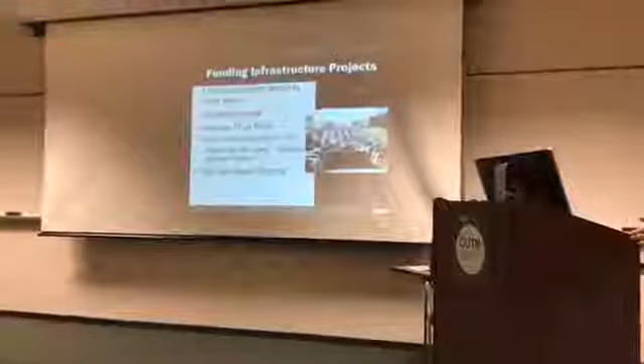As you can imagine, the cost of everything has gone up, construction has gone up, and there was no funding to do it because nobody wants to take the initiative to add more taxes, right? You know how politics works, no more taxes.

In addition to that, the efficiencies from the cars, all the Priuses of the world, have really reduced the amount of gas that you purchase. So there you go, you again have a reduction in the Highway Trust Fund.

So when you look at entities like the state and local governments trying to build something, they had to look for alternative ways to fund projects so that they can build it. So what I want to do is go through the normal contract types and then talk through alternative funding, so you have an understanding of all the different facets of funding that we go through in the transportation industry. My team predominantly does infrastructure projects, roads, bridges, toll roads, all of that.

So the standard state, federal, and local funding is usually used to do what we call a design-bid-build job, the standard process. You have a set of plans, you let it out to bid, and a contractor bids and constructs it. I'll go through the details of that.

A design-build is where the contractor and the designer are on one team and bidding on a job together. Then you have the alternative funding, which is a design-build-finance, basically design-build but with a financing aspect to it. And then you have design-build-finance-operate-maintain, which we always refer to as the P3, the public-private partnership. So when we go through that, you'll understand the distinct difference between a design-build-finance and a P3.

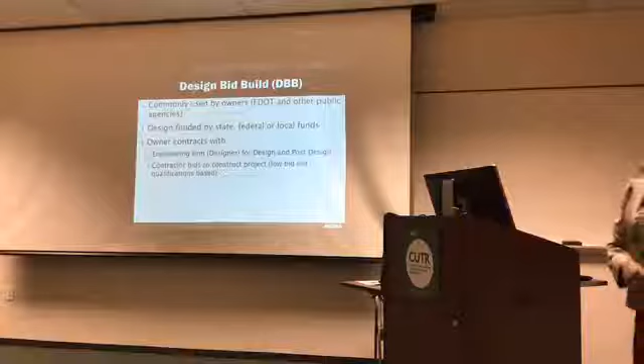So let's talk about design-bid-build. Like I said, it's commonly used by DOT and all the other public agencies. Design is always funded from federal funds, state funds, any local funds. Sometimes there are counties who want to put in some money to build their system, so there's local funds coming in addition to the state funds.

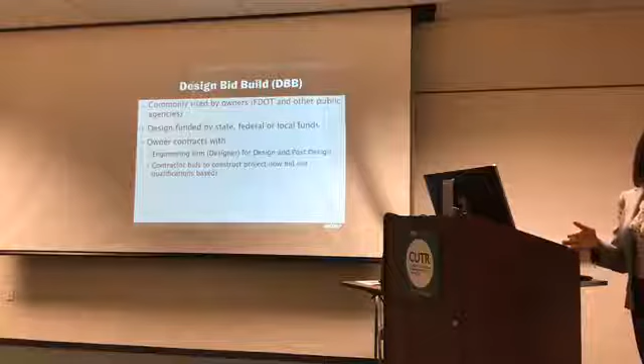And the owner, in this case let's talk through FDOT because that's my realm of work, so the owner is FDOT. FDOT will contract with the design firm. The design firm is selected based on, Florida requires it to be a qualitative selection, not a price-based selection for design.

So we comply with what's called the CCNA Act, a legislative act, the Consultant Competitive Negotiations Act. The selection for a designer is purely based on you presenting on the project and showing your expertise and qualifications. You get shortlisted, you've got to go present to the owner, and you win the job.

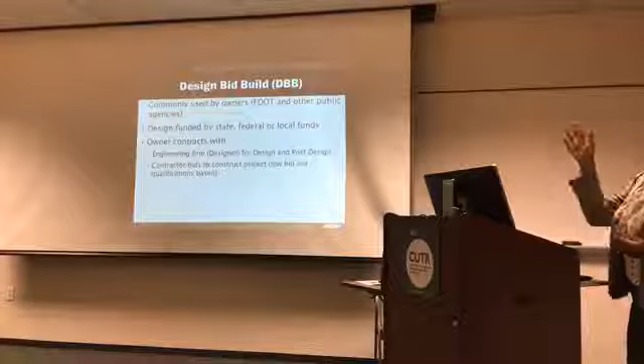So when you win the job, you are the designer for that project. You go through the process of identifying additional right-of-way, utility conflicts, doing all that, which takes about 2 to 2.5 years if it's a substantial widening job. And sometimes right-of-way takes a little longer.

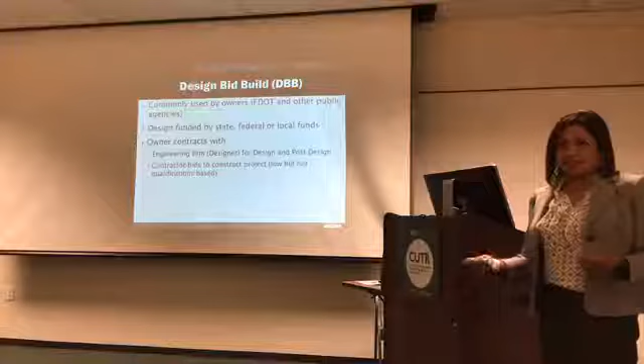So you're going through all this process to make sure everything is in compliance with the scope and in pretty good shape, because the contractor is going to come bid on it. You don't want any errors in it, because errors basically come back to the designer. So the designer ends up designing it, signing and sealing it, and then it goes out for advertisement for a contractor to bid on.

Well, the contractor's bid is purely based on low bid. No qualifications come into the picture. So the owner doesn't get the benefit of knowing if a contractor is really good at this type of project, because we have seen situations where a new contractor is trying to come into the state to do work and they really don't know the nuances of FDOT's work, and they end up low bidding it just to win the job.

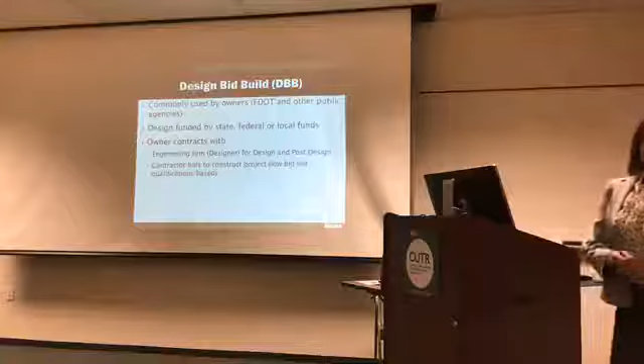We call it buying a job. When you see a job that's way low bid, all the engineers panic, I'll be honest with you, because they're looking for errors and omissions to try to recover their cost. So that's kind of a common theme.

If you see a new contractor win a job, you're all fingers crossed. So the contractor bids on it, and they have a duration they're required to meet, the scheduled duration, and they build the job. So like I said, the owner has two separate contracts, one with the designer and one with the contractor.

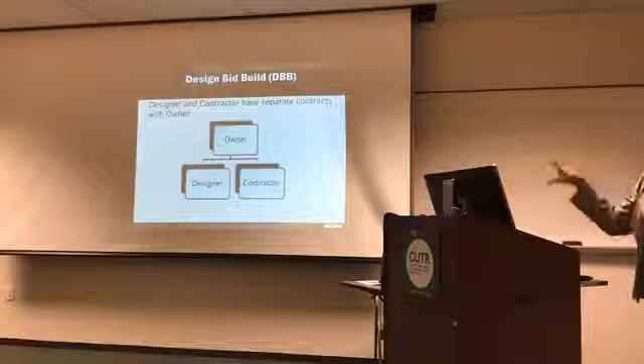While the construction is going on, the designer actually goes through and does what we call post-design services, which is basically supporting the contractor. You have requests for information, RFIs, you have shop drawings, all of that come to the original engineer of record, and we go through and support the contractor to make sure it's built per our plans and built for the scope that the owner was expecting.

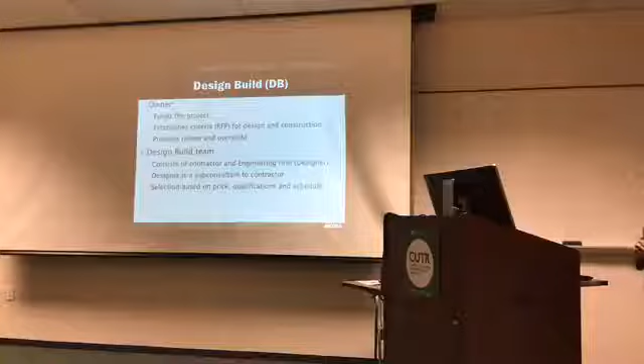So let's go into a design build job. This became quite popular in Florida in the early 90s. The main incentive to do a design build is how it can accelerate a job. That's the main reason it all started getting very popular. And then it got really popular for a while and then backed off because it had its own issues.

So the way a design build works is funding again comes from the owner. The owner brings in federal, state, or local funding, funds the job. The owner establishes an RFP, a request for proposal. So the request for proposal includes the scope of the project, the specifics of the project that the owner wants.

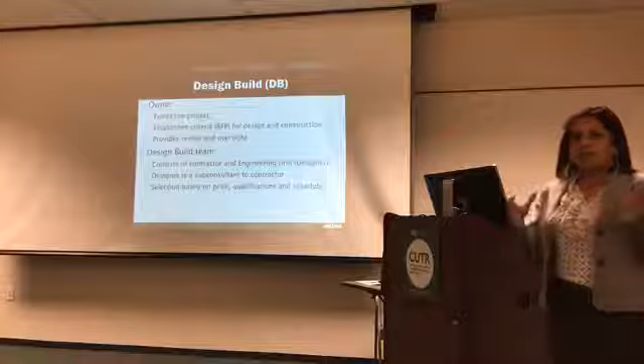The level of detail the owner wants, in terms of where the accesses are at the ramps for the interchanges, all of that is very defined so a contractor just can't come build whatever they want. It needs to be what the owner's final outcome is. So the owner's responsibility is to do the RFP. Once the RFP is advertised, then you go through the process of how the selection happens.

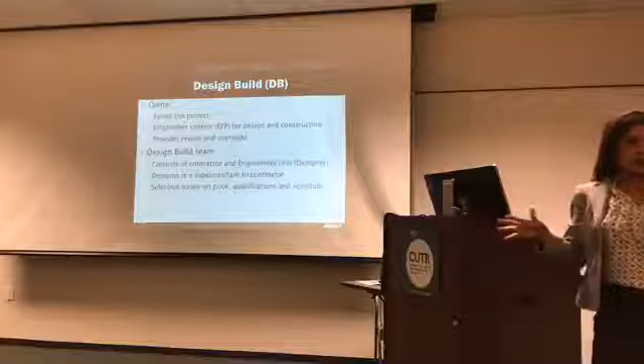The future responsibility of the owner after that is purely review and oversight. So you'll have reviews of the design plans, to make sure the designer is providing plans per the scope in the RFP. And they do construction oversight, so there'll be somebody in the field called the Construction Engineering and Inspection, CEI. Lots of abbreviations here. The CEI oversees the construction, for design bid build too.

So the design build team, this is the difference. Remember how I said the owner has a contract with the contractor and the designer separately? In this case, the owner has only one contract. It goes to the contractor. The contractor has sub-agreements with the designer as well as all the subcontractors he or she has to use.

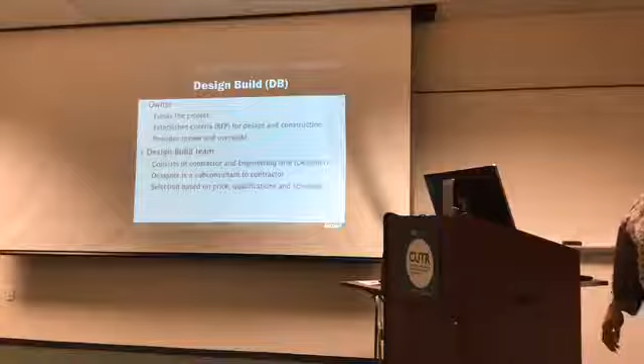For say bridges or utility relocation or whatever it is. So the owner is really only directly in communication with one person, in terms of the contract terms, which makes it easier for them. Of course, they're communicating quite a bit with the designer because the designer's criteria needs to be what they're looking for. So the designer is a sub-consultant to the contractor.

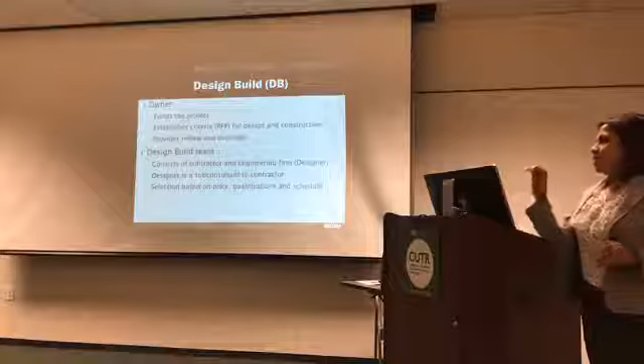And the big difference you see is the last bullet: the bid is actually the overall proposal, and the bid is based on qualifications, price, and schedule. Remember in design bid build, they have no hook for the contractor to see if the contractor can do good work. In design build there is, in the phases as they go through to select, they do give a grade for the contractor, so they have mechanisms to kind of put somebody out if they don't want them in the overall picture.

Can construction start before the design is at 100%? Yeah, I was gonna go through that. That's the other big advantage, the schedule advantage they're gonna get.

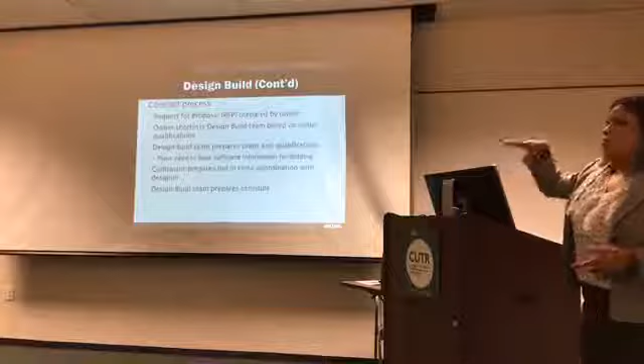So the contract process: you'll have the RFP the owner puts out, it comes out as an advertisement. So us, like we do quite a bit of design build, we team up with the contractor, come to our terms and conditions agreement and what our role is, what their role is, and who are the sub-consultants that we have who are gonna support us.

And we put that team together and go forward to respond to the RFP. The owner takes that response and shortlists and grades it. So there's a phase 1 and a phase 2.

Phase 1 is that first stage, what we call the expanded letter of interest. They have specific criteria they want you to show to see if you're qualified to do the job, which includes grades for the contractor, fatalities they've had, things like that. So it's not just the designer's qualifications, they're looking at the contractor's qualifications too. There's a point system broken into 5 major criteria, 20 points total, and that's what the ranking is based on.

When the owner releases that point system, for a design build job a lot of times they don't shortlist per se, they'll do the ranking. Based on the ranking, the contractor team decides if they want to go to phase 2, because each point is an adjusted score tied to the price. So if you're off from the first ranked person by 3 points, and the project's worth 100 million, that's a lot of points and a lot of money you're leaving on the table. It's hard to overcome that in a bid, so a lot of times they walk away from it.

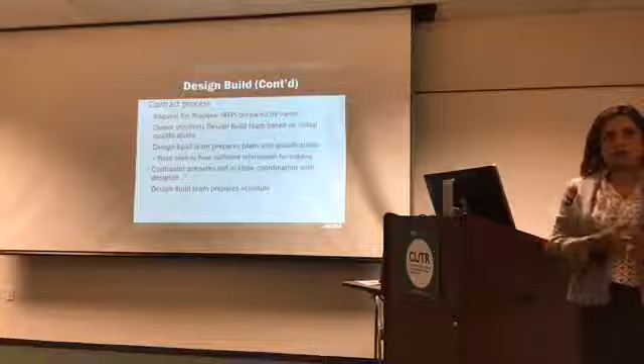So the design build team that decides to go forward to phase 2 will prepare the plans, and it's a very collaborative effort. When I first started doing design builds, I'm gonna date myself, it was in '97. It was fun for me because I always did design in an office, and once in a while I got an opportunity to go out in the field if I had questions.

My background was bridge design, and I really wanted to see how things were built. With design build, you already build that relationship with your partner, the contractor, so you talk through, hey, we want to build this way, do you have any other tricks to get it done faster? You really collaborate with the contractor to find the best way to design things, because in transportation you have to phase the construction, and there's a lot of nuances with that. It's a great opportunity to learn a lot through the plans preparation and bid process.

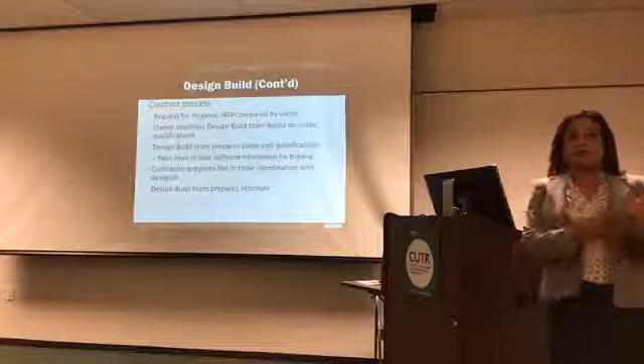So we end up having to do plans which are not 100% signed and sealed, they're plans ready for a contractor to bid on. The RFP will say we need X, Y, and Z plans confirmed, because that becomes their contract document saying you've agreed to do all these things. But in addition, we have to do more details for the contractor, because he needs that to bid it, since what he puts in as a price is final. The owner signs off on that agreement and he's not going to change it.

So even during the bidding process, there's a lot of coordination going on between the contractor, the designers, and all the sub-consultants like geotech. The design build firm also prepares the schedule, because the owner has a limit on it. A lot of times they say this is your max - if you can't meet the max you have to put your schedule duration, and if you can't meet the max at all, you get thrown out and automatically disqualified.

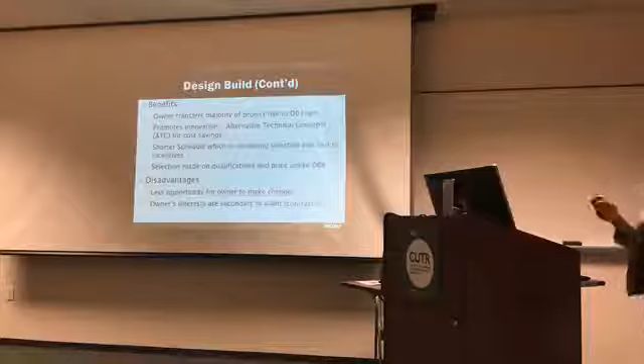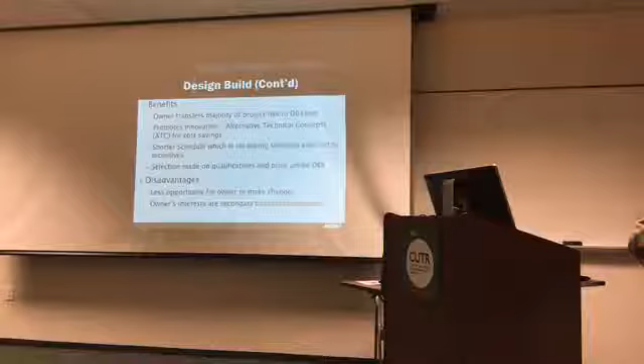So the benefits to the owner on a design build - like I said, when they set up an RFP, over the years FDOT has learned they had to really tighten the screws on their RFP. There'd be little things where somebody would figure out the language isn't a 'shall', which is confirmed language, or if you say 'you will do this,' the argument came back that you didn't say 'shall,' so we changed it, now you can't tell me I can't build it that way. So a lot of the RFP language got very tweaked because they didn't want contractors figuring out ways to get around it. Once the owner does a good RFP, they've basically transferred all the risk to the contractor team.

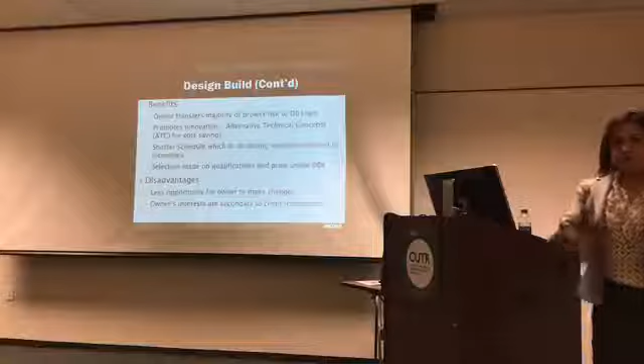Because the owner only provides as part of the RFP what they call informational documents, the plans are more conceptual. If they give you any geotech, because they did some, it's informational—take it at your own risk. If you want to know more about what's going on in the ground, you better go do your own geotech before you put that bid in. So all that risk gets transferred to the design build team, which is great for the owner, because there's a lot of things you discover as you go through final design. That's why owners like the fact that the risk gets transferred.

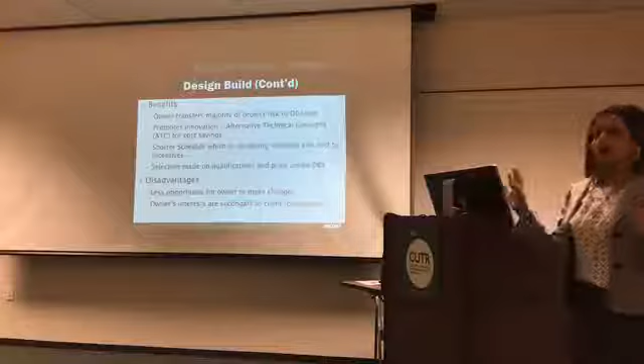But the other big thing that made this very popular is what we call alternative technical concepts. During a bid phase—it depends on the project size, so when we talk about I-4, the I-4 Ultimate project was a $2.3 billion job. I think it took around 11 months from when we decided to move forward to when we actually got everything submitted, because the effort is substantial. So during that phase, you do these things called alternative technical concepts.

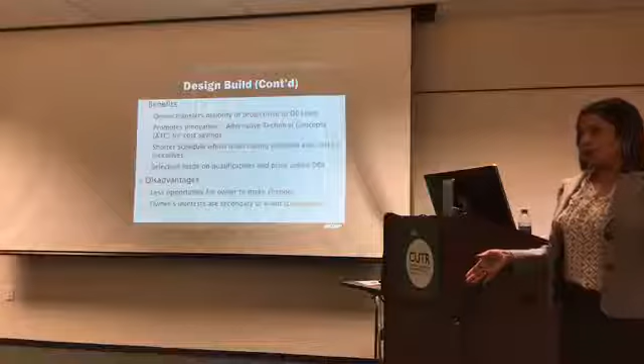For example, you can take an interchange where the owner has a concept for a certain type of bridge or span configuration. If you have something innovative, you present it to the owner and say, here's what I want to do instead of your concept, and here's the benefit. A lot of times the contractor's benefit is on the cost side, the price. As long as you can justify it to the owner that there's a good benefit, and you haven't drastically changed the scope of that interchange, that idea is yours.

Nobody else on the other teams gets to hear about it. Unless there's a true scope change, the owner does not have to re-release the RFP, which is great. We threw out like 60-something ATCs on I-4. Not everything stuck—you sometimes throw things out just to test the waters on the scope, to see if they'll bite. That's a great way for them to save money too, because now you're getting new creative ideas from the team.

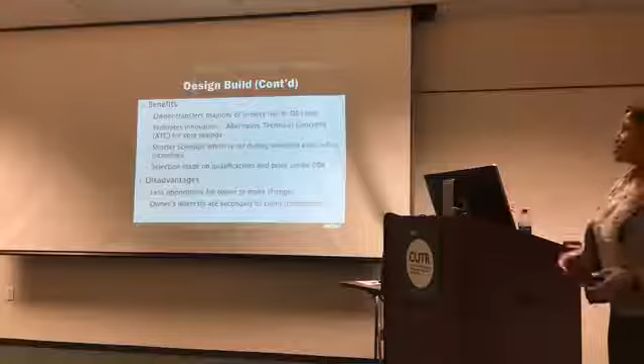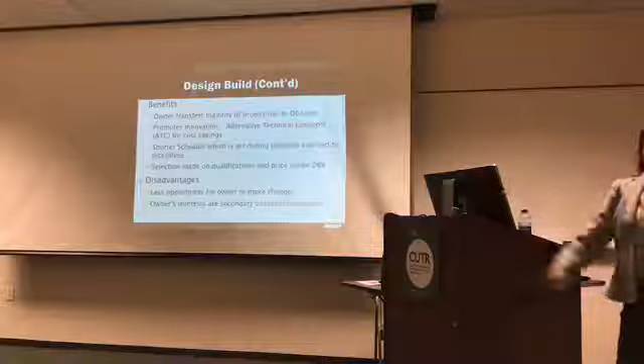And the shorter schedule—to go back to your question, that's the big difference. Remember, in design bid build, the designer designs, goes through 2.5 years, signs and seals, then the contractor starts constructing. In this case, once you win the job, you start breaking it out into packages. The initial package would be clearing and grubbing, clearing out for the contractor to come through and do a temporary pavement or whatever it is. So you're not trying to design the entire 100% set of plans for the whole job.

If it's a 3-mile job, you basically base it on each of your MOT phases. You look at it and say, okay, my first phase includes this—give me a set of plans for that. The owner reviews it and releases it for construction. It's called RFC plans, released for construction.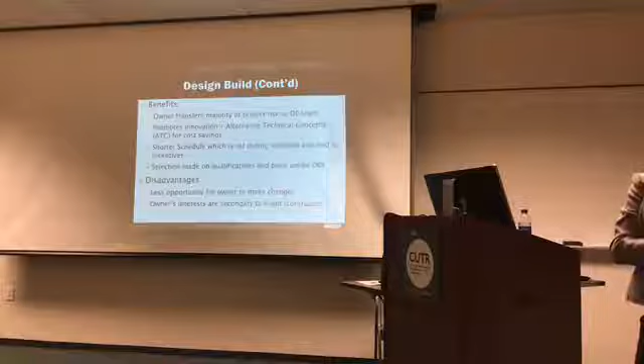Normally on a design build job, because contractors are so hungry to get their job done, paid, and out, you don't really get the duration you'd normally get on a bid build job, even with all the packages. Say it's a 2 to 4 lane widening job—normally it takes about 2.5 years for a designer to do it. They'll give us 6 to 7 months to do it. That's how fast-paced these projects are, so there's a lot of burnout happening on the design side.

But the benefit is, construction starts right away and you're working with them, and they may see things in the field while you're doing the next package, and they say, hey, fix this—we saw this in the field. So it's a nice way to do design because you're working with them side by side, looking at different options, and the schedule is completely shortened. The design schedule is hardly any design schedule at all. When you go to I-4, you'll be floored how quickly we delivered that project.

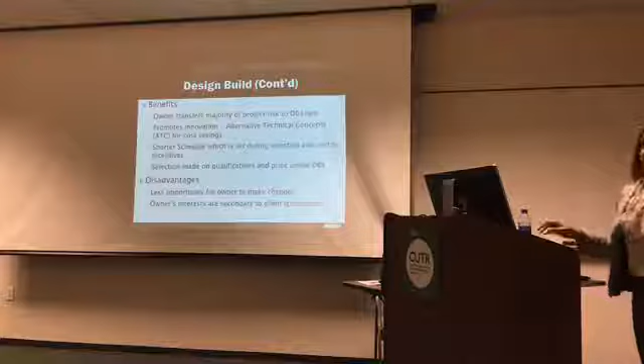The selection is based on quals and price, which is a good benefit for the owner. The disadvantage is once that contract's locked in with the RFP, if the owner wants to make a change, contractors usually don't have a big appetite for it, because they know it'll throw a kink into their schedule and what they've already planned. A lot of times that's where a contractor tries to get more schedule time and more money.

When they're trying to low bid it, the minute the owner asks for a change, every average price shoots up with the contractor because they're thinking, you really need this change, so I'm going to make money off of this.

So a lot of times owners get stuck and can't make major changes, having to hold back. Another thing owners complain about, though I don't think it's truly factual, is they feel like they don't have as much leverage with the designer. They say, we know you know the criteria, but the contractor is always trying to finagle something, and since you're getting paid by the contractor and your agreement is with the contractor, there's less opportunity for us to dictate.

The problem with dictating from the owner's standpoint is, if the owner says 'I want you to change this to this,' but what was presented was per criteria, per RFP, that's called a required change by the owner, so they have to pay the contractor for it.

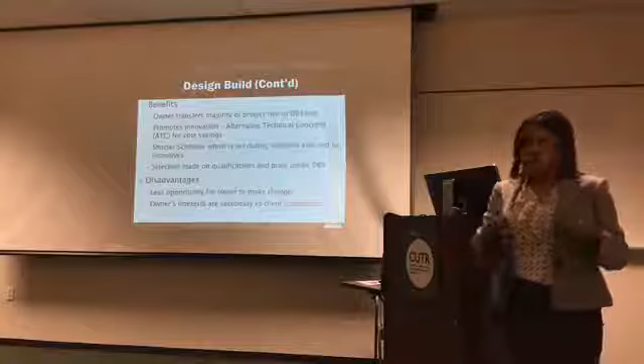So reviewers had to get trained, saying you cannot go ask for a want just because you want it that way, just because that's what you're used to doing, if something is already working and fine. You can't do that, because they will ask for additional money and schedule.

So to give you an example about design build, you all know about the Howard Frankland Bridge. It's going through procurement right now. Phase 1 has happened, but the people involved haven't moved to phase 2 yet. This is basically what I was talking about.

If you look at it, the phase 1 scores are over a score of 20. You see all the additional contractors at the bottom — they just decided not to go to phase 2 because their scores were substantially lower than phase 1, 16.8 versus 13.8. That's 3 points on a $30 million job.

People back off at that point. So for the number 3 and 4 ranked, and the number 2 that's sitting in there — they had a score of 14, off by 2.8 points, but in the final ranking they came in second because they really lowballed the bid. To be honest, Pepper Contracting has only done very small jobs.

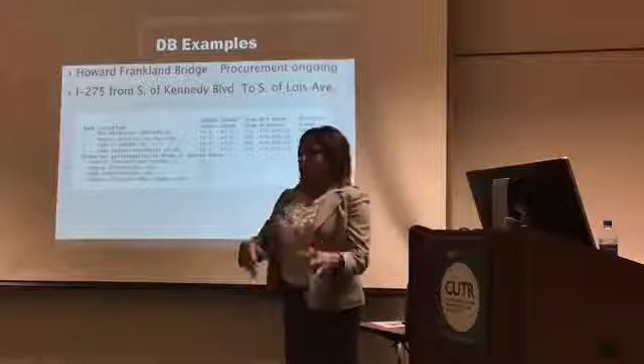So that's one who was trying to buy the job, basically. The phase 2 score is over 80 points, so the total is always 100. Phase 2 is where, after phase 1, you're doing your plans and preparing your proposal, and that's the score you see in the second column.

If you look at the proposed time, everything says 520 days except for Pepper, who's at 490, mainly because the contractor says, I kind of need 520, I'm not going to lowball it because of the schedule. And yes, it's working calendar days — contracting is always calendar days.

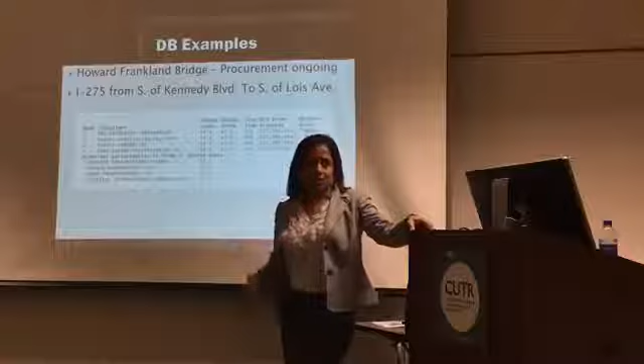So the contractor sometimes has a formula that includes schedule, which tightens things up, but this one did not include a schedule formula — it was pure price plus the phase scores. So if there's no schedule tied to winning that final number, they usually just take the schedule the department gives them rather than trying to squeeze it down.

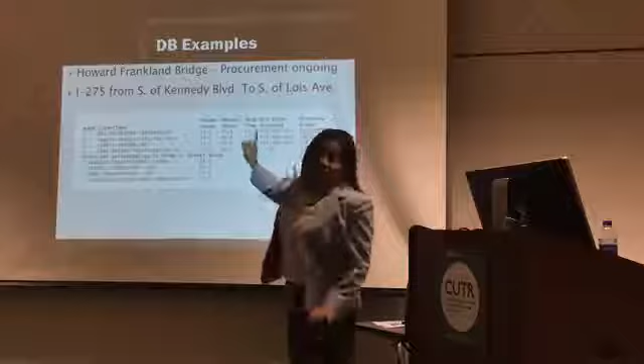Another reason people tend to do things like this is phase 2 is scored all at the same time, so they get to see that schedule when they're scoring. They think, maybe I can get them to swing a few points my way because I gave a shorter schedule. So the final outcome is the adjusted score, which is basically the price divided by that plus that.

Whoever gets the lowest adjusted score will end up winning the job. So in this case, it was Middlesex, and we work quite a bit with Middlesex, very good contractor to work with. And you know where this is, right?

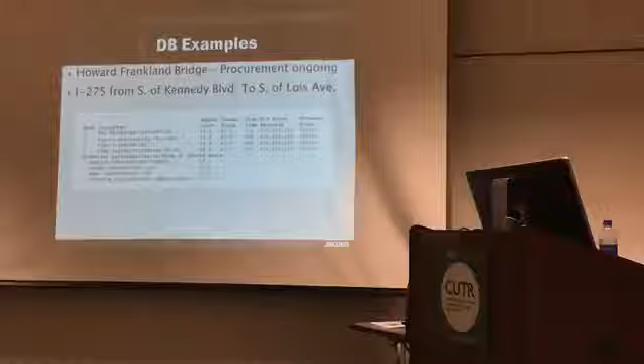The totally messed up loop ramp when you come off of 60 Veterans to come onto 275, that loop where you just sit in traffic - that's what that is. They're actually modifying that to improve it.

So let's go to design, build, finance. And all that's public, all those numbers. Everything's public, and after the selection, the proposals are public. So if there's something that looks funky in the scores, somebody can protest it and say, I want to see all your scores and your proposals because I think you swayed your score for somebody, because the score details it.

The people who are scoring, there's usually at least 3 people in the technical review committee, so they get to see those scores, what added up to that 80 points, and if somebody looked like they swung it, they'll protest it. They'll say, I think you were trying to get this contractor to win the job, so we're gonna protest it.

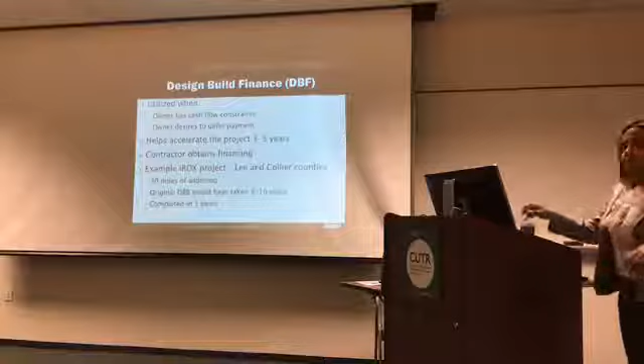So design build finance, again, is basically the same concept as design build, but I-75 is the best example for it. It was a 30-mile widening from 4 lanes to 6 lanes. The stretch through Lee and Collier County was a disaster through the 90s. You just could not get through there during peak time.

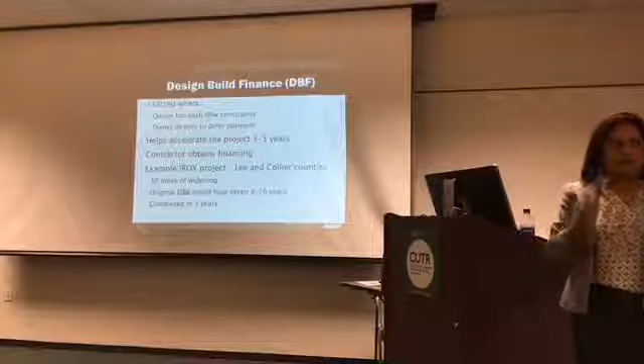FDOT's funding was sitting over like a 6-year program. They could not get it, because it was all broken into multiple projects, and they could not get the funding pulled in because that's the amount of money they had. So when they have a cash flow constraint, by legislation they can defer it to a certain period within the work program.

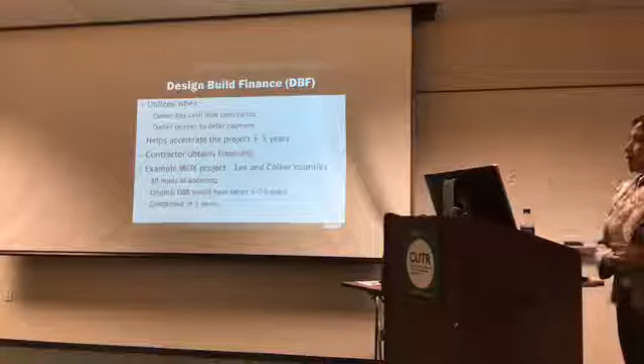When they can do that, FDOT tends to want to go to the finance option if they want to build it faster, because they don't want to wait till the overall funding comes 6 years from now and then do a design build. So in I-75's case, if you look at it, 30-mile widening, the original design bid build would have taken 8 to 10 years.

So the contractor came in, did everything similar to the design build - the scores and all of that - but they have a financing arm to show FDOT how they're going to build this with the financing they're going to pay for, and FDOT just repays them. It's like a loan. The contractor gets a loan, FDOT pays back the loan.

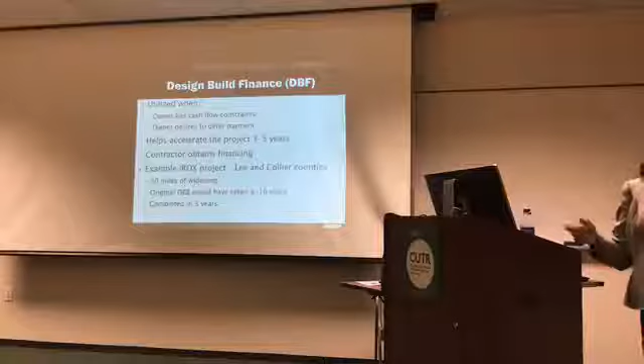So they were able to do the entire job in 3 years. And FDOT got their job much faster, and they programmed their money and just paid them back. I think they paid them back in 6 years, and they were done. They were out of the picture.

So DBFs are usually done only when they're in that sticky situation. You don't see that very commonly. I-75 was actually the first one that they did in Florida. Then we had a job that we did on I-95 on the East Coast in Volusia County. But they don't tend to go to that very often.

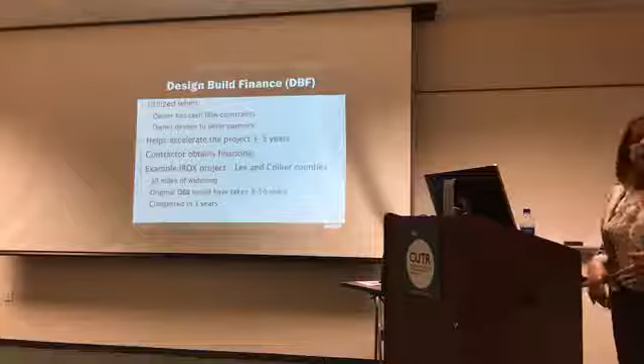And this didn't involve tolling at all? No tolling at all. Because the way the toll projects work is that the agency is Florida Turnpike Enterprise. They're an arm of FDOT. They're one of the districts of FDOT. FDOT has 7 districts plus the Turnpike.

Each district covers certain regions. So this area is covered by District 7, and Orlando is District 5. So the tolling money stays as part of that district. They can't take it and use it in District 5 or District 7, because their responsibility is to take that entire money, because the Turnpike goes across the state. So they make improvements across the state with what they collect, and do maintenance improvements based on what they collect.

So let's go to the fun one - public-private partnership, P3s. Legislation allowed the state to do up to a certain amount. You can't take everything and convert it into a public-private partnership, only because legislation is concerned. One of the things you'll see is it's a concession agreement, a lot of times 35 years or 40 years, and concessionaires have defaulted, and the state ends up holding the bag on a bad project. So Florida legislation stipulates what can go into a P3 project.

When I go through the discussion, I'm going to talk about the I-4 Ultimate project, but I-4 Ultimate was set up as a 40-year concession. The funding combination for P3s generally, the state still puts in certain money, and then the private entity comes and finances the rest. But in this structure, they're financing more than just the construction. They're going to finance, maintain, and operate it for 40 years, so the amount they have to finance is substantially more than just the construction cost. So when I say $2.3 billion, that's just the construction cost. It doesn't include the maintenance or any of the additional effects out of doing that.

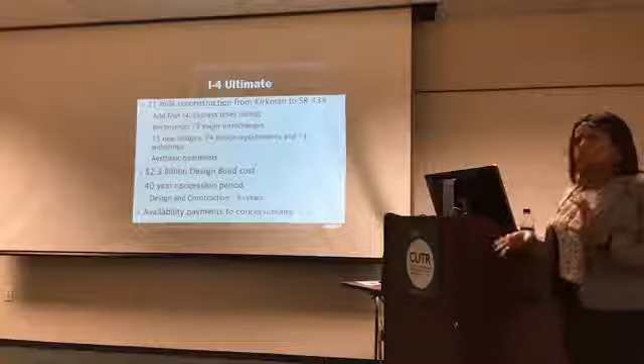There were a couple set up as they were building through, they knew they wanted to come and do something in the future, so they set it up to get that space. But pretty much all of downtown, and the downtown area had 55-year-old bridges through the viaduct and stuff, so they wanted to blow all that out. So then the price went up, right? When you have to blow all that out, the cost went up.

So what they ended up doing is saying, okay, let's make this a P3 job and put it out to the industry. A lot of times with P3s, they'll come out to the industry and do an industry forum. The forum is basically to get feedback - they'll come up with a rough draft of the RFP and things they want on the project and expect out of the contract. They get feedback from the contractor because they want to make sure there are enough people bidding on it, that they're not making it so tight that nobody will bid on it.

So the industry forum was done in early 2012. If you look at it, the project had 15 major interchanges, 15 new bridges, 74 bridge replacements, and 13 widenings, and it had a substantial aesthetic concept associated with it. When we originally did it as 6 projects, nobody really envisioned it to be this beautiful, almost a parkway effect through downtown, but they decided, hey, we're getting this opportunity to do this for a 21-mile stretch, let's make it pretty. So the aesthetics were very integrated into the bridges and the walls and stuff, which threw a whole new kink into our design side of it.

So the project got bid, and there were 4 people who moved forward. This was actually shortlisted because, I forgot to mention, on a design-build or any of these projects, FDOT gives you a stipend for the losing teams.

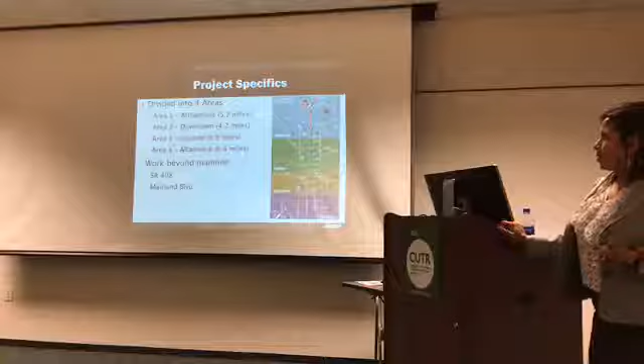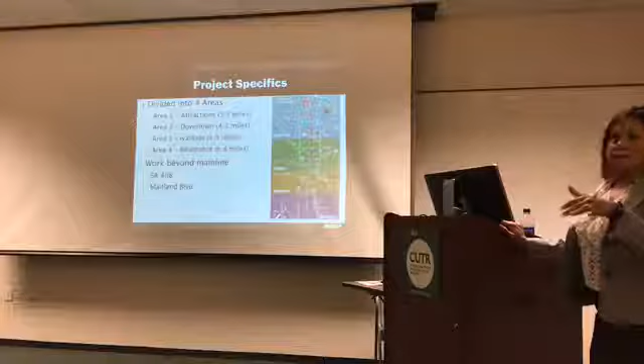So the project itself was divided into 4 areas across the 21 miles. We had to give it fancy names, because you've got to make your proposal pretty and exciting. So we called it the attractions area because it was close to Universal. Then you had downtown, the major part of the project. Then you had the Ivanhoe, which is Lake Ivanhoe and all that area north of downtown. And Altamonte is the city north of Maitland area, basically the beginning of that section. Those were the limits of the job, the total mileage.

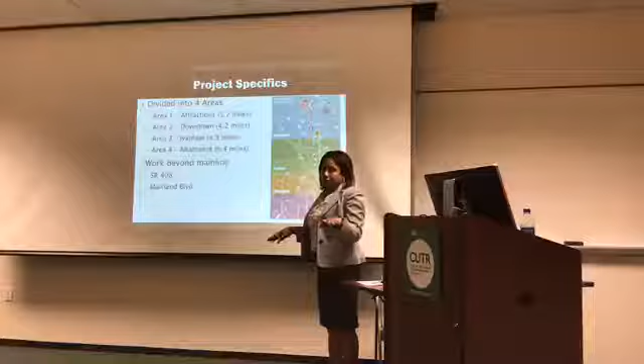But there was a lot of work beyond I-4. You can see 408 running through here - in order to reconfigure this interchange, which was a major reconfiguration, right now it's like a trumpet with all these merges going back and forth, it's going to become a 4-level interchange. So everything is direct access, eastbound, westbound, northbound, southbound on I-4. It's kind of nice when it's done. Doing that ended up impacting the west side because a lot of modifications were going towards the west, so we're going about 3.5 miles into 408 to tie down everything and reconstruct it.

And the same goes with Maitland. I can't even see Maitland. I'm getting old. Yeah, it's right up here. This is Maitland Boulevard, just south of Altamonte.

So for Maitland Boulevard, DOT already had concepts where the at-grade intersections were going to be converted to interchanges, because it's a very heavily commuter roadway, and they really wanted to get people through that system as fast as they could.

One of our ATCs was, it was kind of odd that DOT left one intersection as an intersection. That was the beginning of the bottleneck, right? We did an ATC and said, convert that to an interchange too, then you have free flow coming right through. We ended up getting that ATC, which was actually more price, right? But you got the points because you enhanced their design. So you kind of balance all that out.

When we go through these iterations of ATC sessions that we do, everybody throws out all these things saying, why do you think that's a good idea? And contractors always like, that's more money, I don't want to do that, right? That's usually what you get back, but you have to kind of justify all of that.

And project specifics, man, the biggest issue we had was the utility complex. So all these underground and overhead utilities, because you can imagine we're taking this and putting it out, so there's stuff all along the right of way on the sides.

So there were some sections of Maitland, people were asking me, there's so much construction going on, how come I don't see anything coming out of the ground? I said, it's all underground, because we had 8 months of relocation at Maitland. There was so much, we had big trunk lines from Sprint coming through the interchange that we had to move. So it was major work, and getting those utilities out of the way is key, because you don't want to go drive a pile and all of a sudden hit somebody, right? So that effort was quite substantial.

And then of course you had the stakeholders. So even though the project was set, the scope was set, there are cities, especially City of Altamonte Springs, one of the ones that we struggled with a little bit. They always wanted something else, right? We're like, no, this is set. You go talk to the owner, and then they can come tell me to change my scope, and then they can pay me to change the scope, and I'll do it. So there's a lot of coordination that happens.

In addition, you want to coordinate with the homeowners, show them where all the traffic shifts are happening, detours are happening, because that's one of the keys, that we have to do detours at night.

But the important part was the RFP was set up so that we cannot reduce the lane configuration, reduce the number of ramp lanes on the structure. So we had to maintain what was given to us as the base footprint of the roadway. We had to maintain all those lanes and all those ramp lanes through construction. So that's why you see some things getting slower, because imagine doing the maintenance of traffic while maintaining everything.

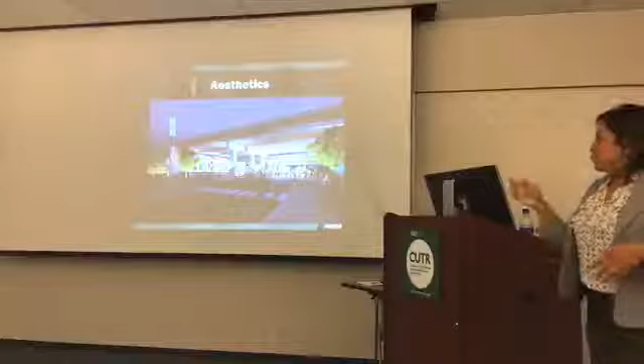So what the city is looking at doing - they have a project coming through called the Under-I. This whole stretch right west of here is where the viaduct starts. It's all elevated, all on columns. So they have all that space under the I-4 area to do what they want to do. They're trying to rejuvenate the city by making it like art festivals, things like that, right underneath it. Because there's enough parking garages around it, it's a great spot, and you don't get rained on because I-4 is right above you, so it's kind of a nice location.

So, challenges during design - change is inevitable, I already talked about it. There's lots of change that always happens. And stakeholder coordination changes, we already talked about several of those.

Keeping up with the team was the biggest challenge that I had as design manager for Jacobs, and I had a counterpart from HDR, Larry. We had to kind of keep up with the team to make sure they weren't getting burnt out because there was so much going on. People were so focused on delivering projects that we really had to take rotations to make sure people took vacations - I'm talking vacations like 3 days, a 3-day weekend.

So that we could let people go take a break with their family, do something, and come back. Because people don't realize the project is such a fast burn. When you have that level of effort, people get focused and tend to forget about personal life, and you don't want people struggling through their personal life because we made them work too much. So our job, since we were sitting at a higher level, not the day-to-day design people, that's kind of what I kept up with quite a bit with my team.

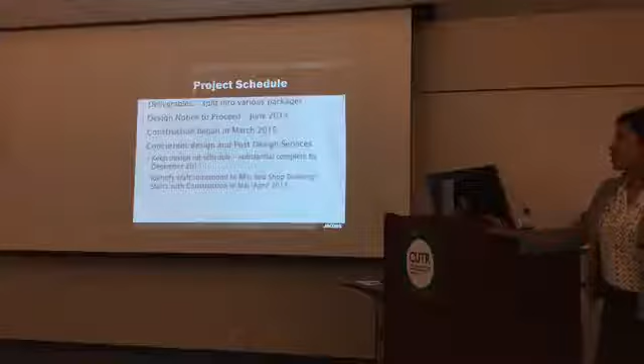As you can see, we started design in June of 2014, and construction began in March of 2015. So you see how fast that moved, and it wasn't construction of just one piece, it was across the 21 miles. Different pieces were getting cleared, utilities were getting relocated, and all of that was happening.

The other challenge we had was, since construction started in March 2015, you have to have support for the contractor asking questions from the field while we are still designing. Contractors started asking us questions in March 2015, and we weren't anywhere near done with design. So we had to identify additional people to review these RFIs when they came in, so the engineer of record could focus on designing and getting that RFC. It was a bit of a learning curve - we didn't realize how many questions were going to come our way, and there was quite a bit, so we had to identify additional people to handle that. Current status, it's 60% complete in the field.

We have a team in the project office at Maitland, which has the contractor, the concessionaire, and the owner. We have a skeletal crew now because it's only post-design services - they manage the post-design and ship everything to the home offices for reviews. So we have a team sitting in the project office, and the rest of the effort comes from the home office for post-design services.

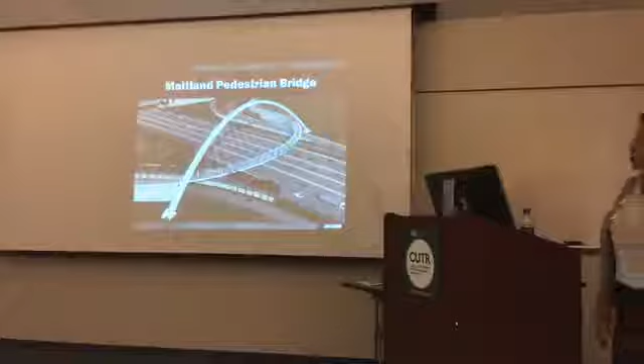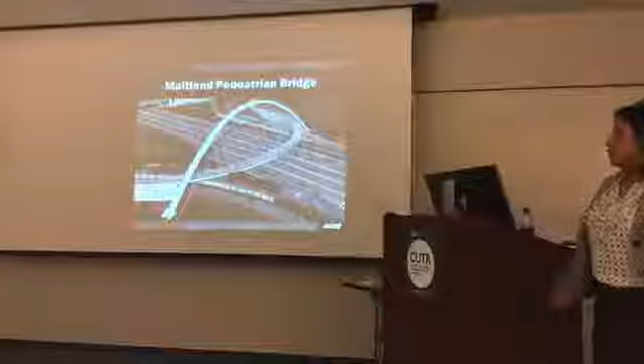I figured I'll end with the Maitland Pedestrian Bridge. This is going to be an amazing bridge when it's done. It's an arch bridge with a suspended pedestrian walkway. I think the total span length is 650 feet, and the arch goes up about 135 feet into the air. It's a massive structure that's coming up. They've just finished the foundations and are getting ready to do the support structures, because these are rectangular sections they have to build like Lego building blocks.

Is it concrete or steel? It's steel. And it needed to accommodate inspections inside and all of that, so it was a very complicated bridge.

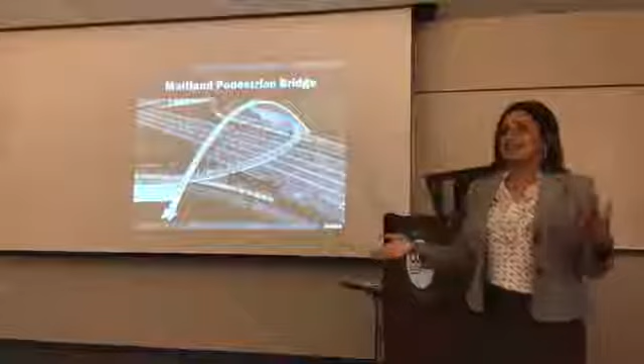This was one where the contractor - the DOT had like a regular, nice bridge, a regular tied arch bridge. The contractor said, we're gonna get points on this bridge, we wanna change this, and brought an architect in. They came up with a design that became a nightmare to design. So yeah, this has been a heartache for everybody. I'm a little paranoid because my designers in Tampa are the ones who designed this, so I'm waiting for it to go up, hopefully everything goes up fine.

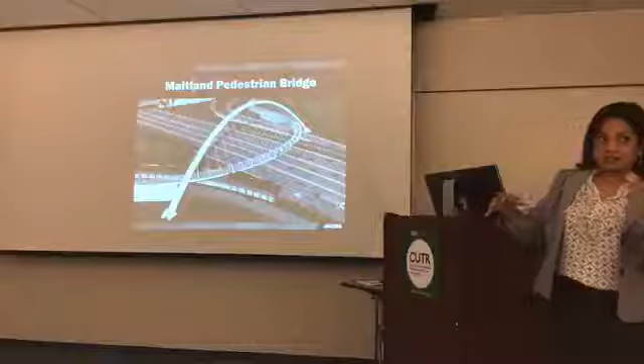The design's not the problem, it's the construction sequencing, because you gotta remember it's gonna take them a while to build it, and they have huge towers - 135 feet - that have to go up with the MOT phasing. What happens during hurricane season? So they gotta time everything to get some of the top pieces done when there's not that wind effect, even though their towers are designed for it. Their construction engineer designed all of that, but you know how hurricanes happen, so we're all kind of holding our breath till this bridge is done.

But that's all I have, guys.

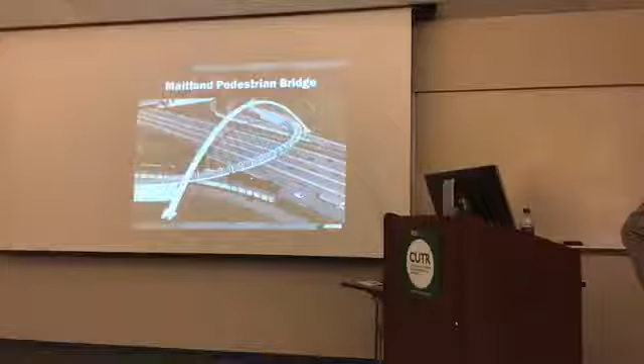Going back to the contract types: design build, in my understanding, should be the cheapest. Design build finance is the next more expensive one. And P3 should be like the most expensive one, right?

Technically for the contractor side, right, but you gotta look at it from the owner's perspective — it looks expensive. Design build finance will be slightly more expensive because you're paying that interest on the loan that the contractor is getting. But with design build finance operate maintain, the owner doesn't have to maintain and do certain things.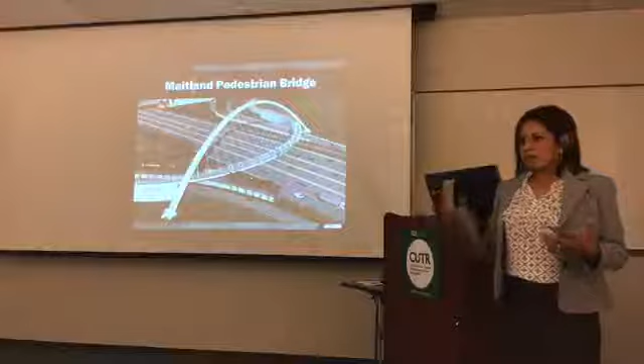So you gotta subtract that cost out of the overall cost, so you can look at it as: this is the overall cost the owner is paying, versus what it would have cost if you constructed it with your own money, since you're not maintaining it for 40 years. Also, if the construction is shorter, your exposure to the risks of construction is much shorter.

Exposure for crashes and injuries and so on. There's plenty of lawsuits already going on with this one. That's normal on jobs this big. But it's going really well.

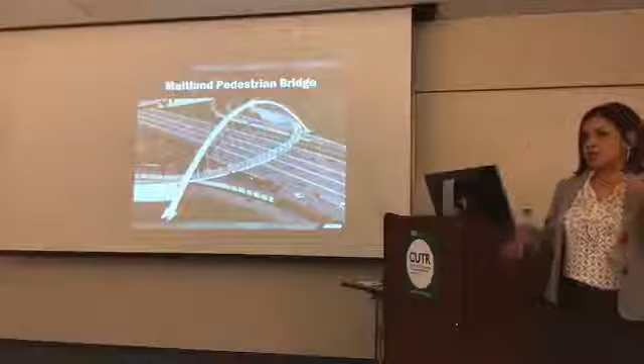We actually opened some major sections through downtown, north of downtown through Ivanhoe. They've shifted everybody to the outside, the south side, which is running on the new system. It's pretty nice. You gotta remember some of these elevation differences through downtown and north of downtown were up to 8 feet that was getting built up.

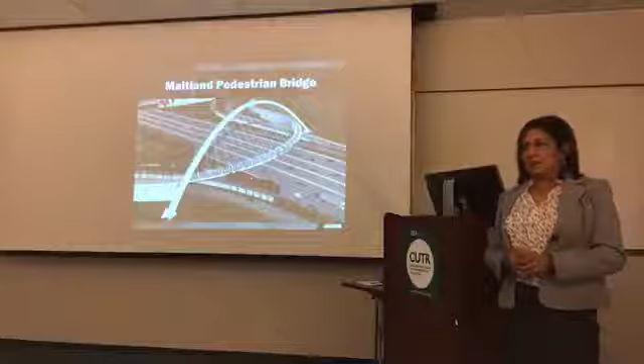One of the comments I've gotten from the public is that they've been able to watch this thing being built, and it's so massively different from what was over there. I've had lay public friends say, 'Now I understand why this job was so complicated,' because they don't — until they see something shooting up out of the ground and say, 'That's where the road's going?' And they're like, 'Yep, that's where the road's going now.'

Clearance requirements have changed since I-4 was originally built, so you gotta make sure everything ties down correctly. It has been a positive from the public, which has been surprising, since all they usually do is complain. But they have actually been appreciative when we shifted to the new lane system.

They're like, 'Wow, this is nice.' We want the final product. Then of course they're in a hurry — when is this getting done? I want the job done, I want to drive on the new roadway. But if you guys haven't been to Orlando, at least go now to see the effect, and definitely go back and see it when it's done. I think it's going to look amazing.

Questions? I have a question. Go ahead.

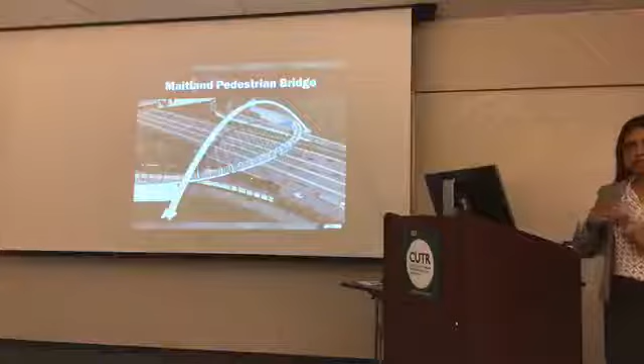Additional to Andy's question: when you're organizing the construction, from the owner's perspective, let's say they hire a separate design team and separate contractor, versus if they hire just one contractor who does all the stuff — they are transferring the risk, but the risk is related to money, so it's becoming more expensive for the owner. And if you want to make additional changes, the price will go up or down. So what was the final result — how much more would they pay for that?

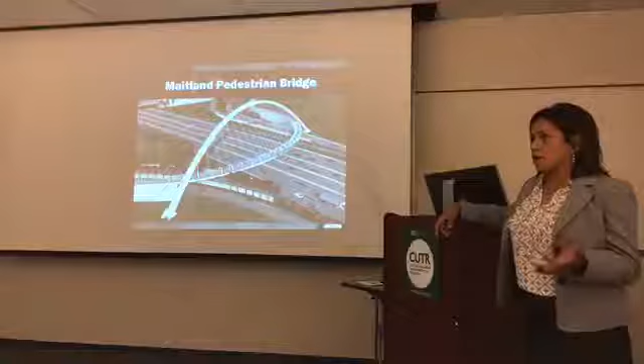When you look at it from the risk standpoint, that's why it's important to do your RFP so well. You're not going to want to make a lot of changes because you want it to be very clear what the contractor is bidding on. The reason the price isn't much higher is the contractor is hungry to win the job, so the contractor is going to figure out ways to lower the bid. You can say what you want, unless you had a horrible technical score — usually the bid is what wins the job.

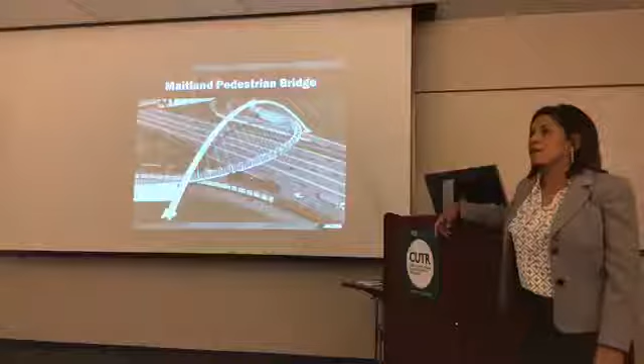So the contractors have figured out on design builds that the P3, the I4 bid is what won the job, because we were much lower than other people. That was something everybody noticed too, that we were substantially lower than other people.

The score comes into play mainly when there's a big difference in scores. But because the early stage, phase 1, is just purely 20 points based on qualifications and certain criteria, it's hard to swing the score too much, unless you had a terrible qualification list or a terrible history of accidents. So the scores are always very tight, next to each other, so then the price becomes important because the score isn't going to make the difference.

Did I answer your question? Yes, okay. Anything else? Did you make any provisions, like especially for autonomous vehicles, in your project?

Not in I4, because you got to remember this was way before AVs became so popular. If you think about it, the industry forum happened in 2012, and the RFP was written, majority of it, in 2009 - way before all of this. So then they were just tweaking the RFP for what they wanted. When I was doing the program, we had written an RFP and they were just tweaking it to identify additional things they wanted to add. So it was way before AV came through, so this project definitely does not have AV implications.

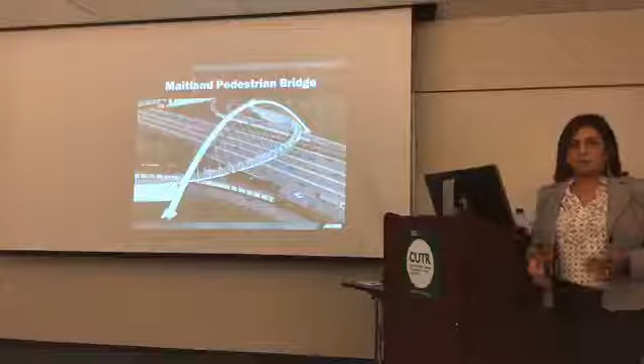It's something that Central Florida Expressway Authority, which has the 408 system, is actually looking at for some projects right now as pilot projects to set it up for AV - to make it a test bed, like using the inner lanes for people to do AV testing.

So did you give any flexibility to do that? No, not in this one. No. So if something should happen, it should be reconstructed?

Not necessarily, because a lot of the AV stuff - what they'd probably look at is, we've got 2 lanes in each direction, and it's barrier separated from the general purpose lane. So the 2 lanes in each direction, you could always make one a dedicated AV lane, because a lot of the AV stuff is based on your lane markings and things like that. So you could switch one of the lanes to AV, it would need work on it, but it wouldn't be a complete reconstruction.

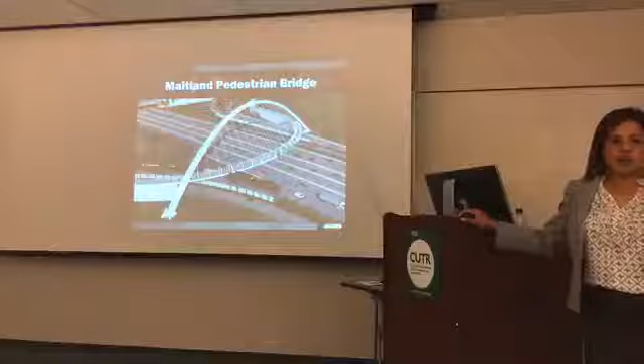Well, we may have time for one more question. Okay, sorry, any other question? How does allocating risks through indemnity provisions work out in the projects that you do? Whenever you're going for bidding on any project, how do you actually allocate any probable risk that's going to happen in the project?

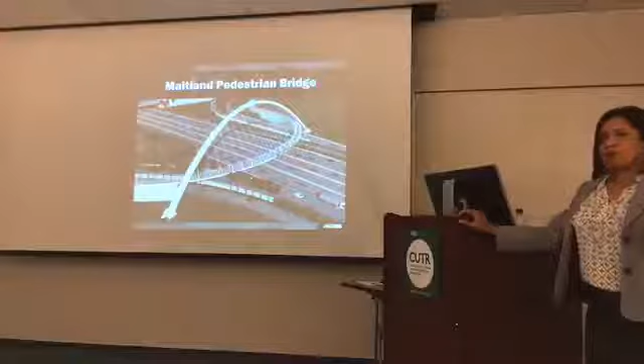So each team member has their own indemnity allocations that we have to deal with. When we do our terms and conditions with the contractor, we have limits on liability, indemnification clauses that we only agree to certain things on.

How does that concept of surety bonds actually happen? Who has to give that? Who has to? So on I4, we actually had a project-specific bond that comes from the contractor.

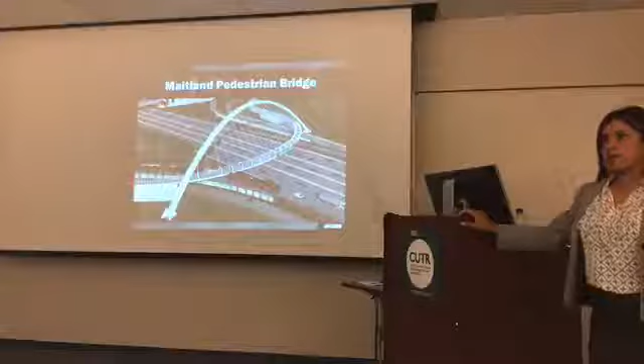I4MP, right - I4MP is bonding for their O&M portion of it, because as a consultant doing operations and maintenance, the contractor is bonding, so the 3 joint venture partners are the ones bonding for their indemnification. Our job is to make sure they don't drag us into their construction indemnity clauses and on the limits of liability, because the liability can be purely based on construction, not design. So those are the nuances we deal with quite a lot to make sure the contract language doesn't drag us into something we shouldn't be dragged into.

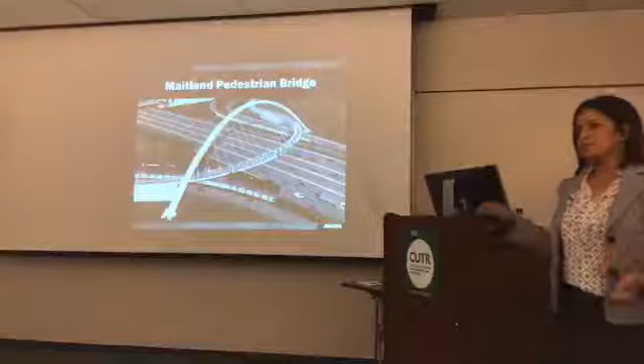So for example, when a claim comes in, we truly look at it - was it a design claim or a construction claim? If it's a construction claim, our project-specific policy won't get hit. Because sometimes one party has to actually support another party in case of an indemnity provision, so that's why I wanted to ask this question. Yeah, so thanks.